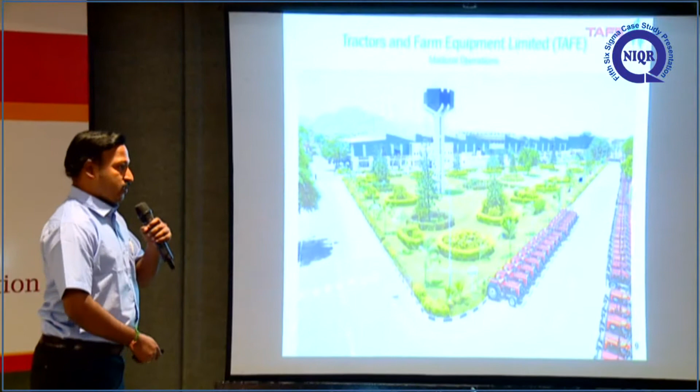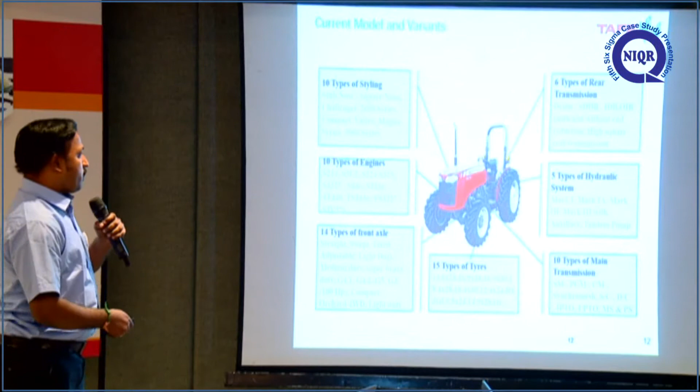These are some of the products we have produced in the range of 25 HP to 100 HP. This is the export model, having various variants supplied all around the world. We are operating cellular manufacturing. These are some best practices followed in our plant. These are some major awards received from external agencies. Now I am going to the case study presentation.

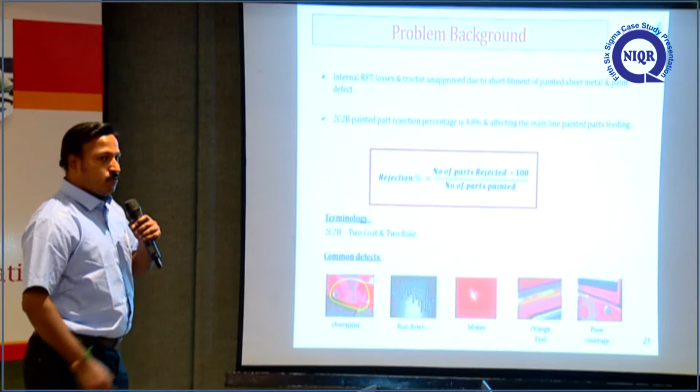Our project is reduction of internal PPM in the 2C2B painting line. This is the overall paint shop: chassis painting, PTCED, 2C2B painting and top coat one. In this area we have selected the project. The problem background is that internal RFT in the overall tractor is getting lost and the tractor goes to unapproved. The approval time is getting delayed. These are the common paint defects.

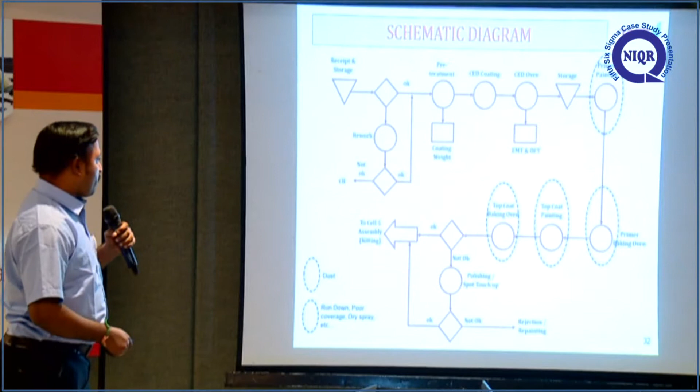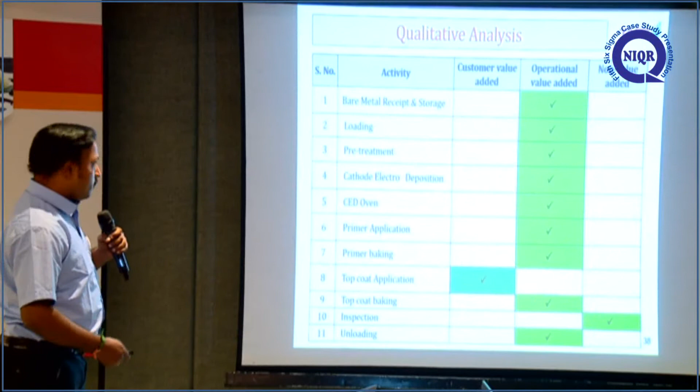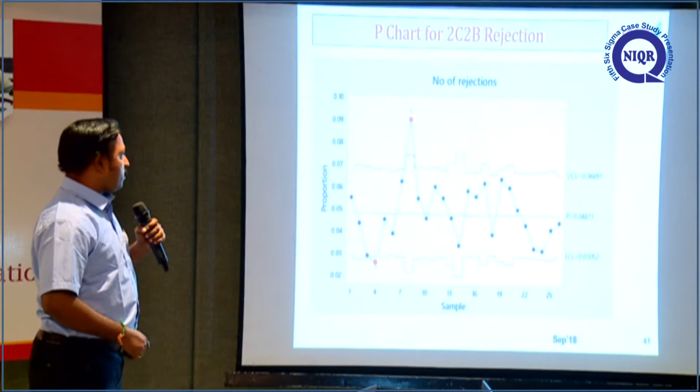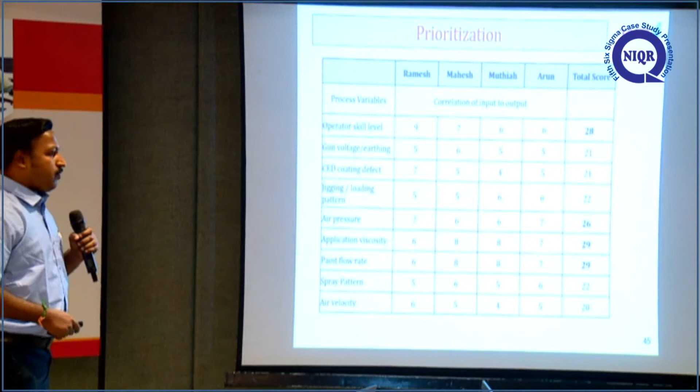These are the measures of the process variables. From that we have prioritized using a ranking method. The team members evaluated all these process variables. Those above 25 ranking marks will be taken for further analysis.

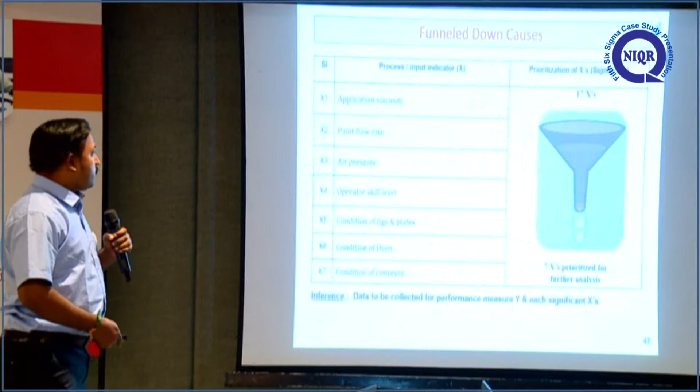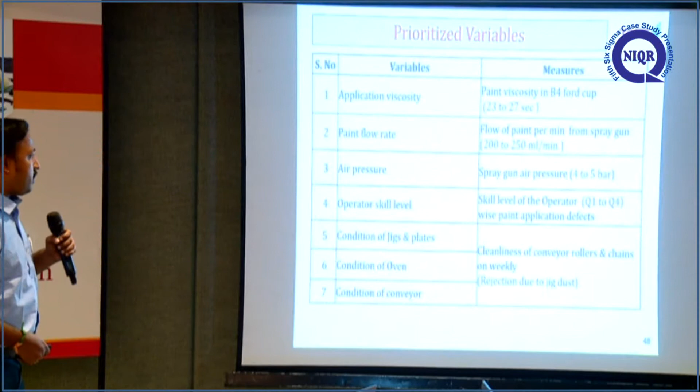Based on the ranking method, we are funneled down to 7 Xs, process variables. All the process variables, these are the measures. Viscosity around 23 to 27 seconds. The paint flow rate should be 200 to 250 ml per minute. The air pressure should be 4 to 5 bar. Operator skill level should be Q4 level.

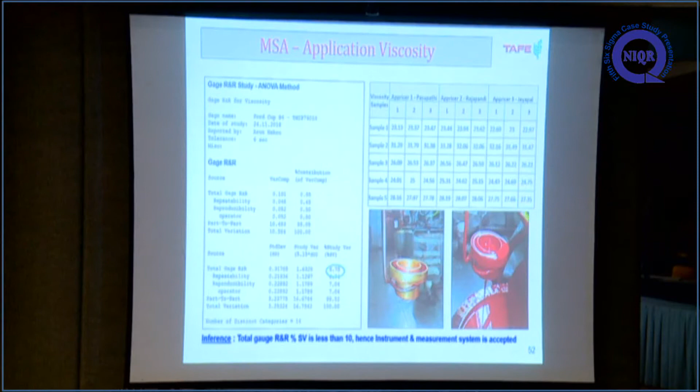Then we are calculating the sigma level based on the process input and number of defect units. Based on that, with the conversion table, the process sigma is 3.1. Analysis phase will be explained by Muthiah.

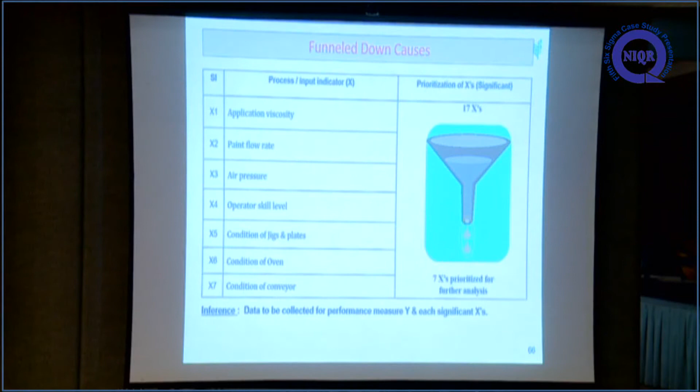Sir, based on the cause and effect diagram, we have funneled down to 7 Xs from 17 Xs. For all 7 Xs, we have analyzed in the analysis phase. First one, for X1 application viscosity, we have done regression analysis of application viscosity with respect to rundown defect. Based on the regression equation, we found the optimum viscosity as 25.7 and the R square value is 62.1%.

The same way, application viscosity with respect to dry spray defect also we have analyzed, and the regression equation shows us 24.9 as optimum value and the R square value is 84.8%. So based on 2 defects, we have taken 25 as a mean, and we have checked our population with a target of 25 using one sample t-test. The p-value is 0, so we have to accept the alternate hypothesis. So there is a significant difference in viscosity between the target and our population value.

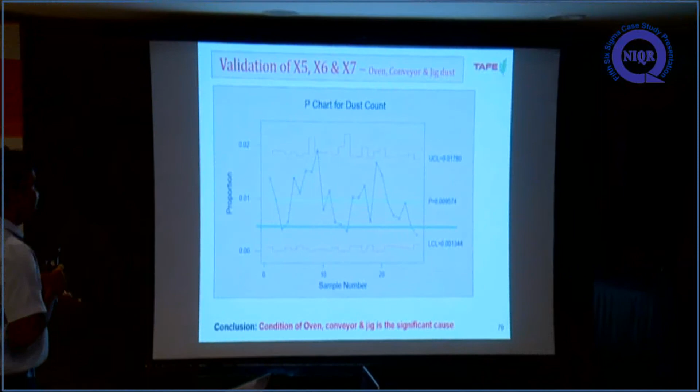For X5, X6, X7, these we have all taken as dust, and dust is a non-parametric value. So we have done a p chart, and the p chart is showing an abnormal condition. So it is also a significant cause. For the oven dust, we have done a quick win improvement. Earlier the oven was cleaned by normal cleaning.

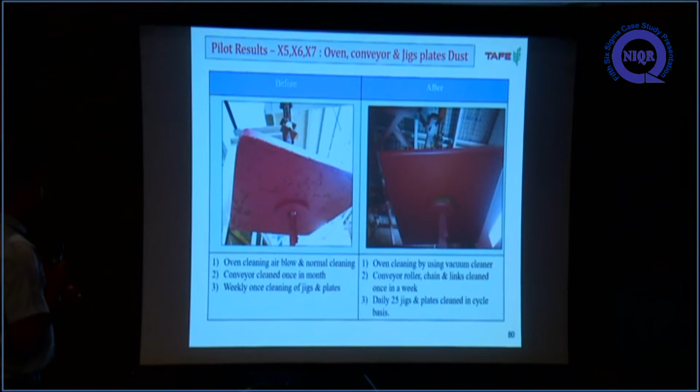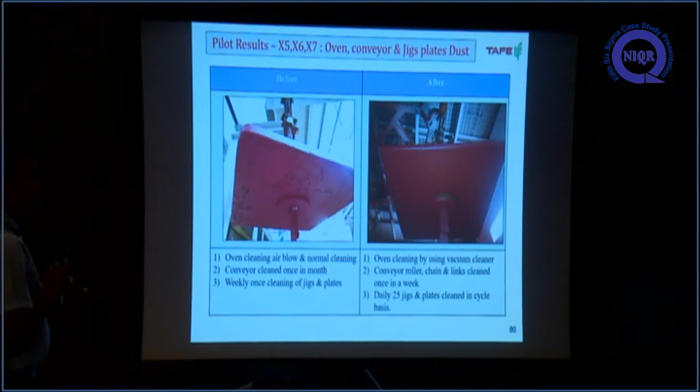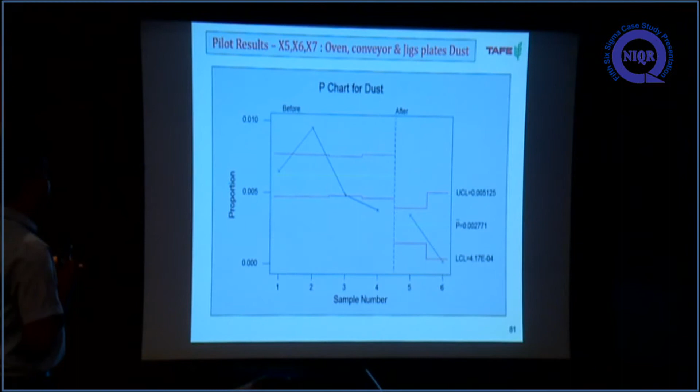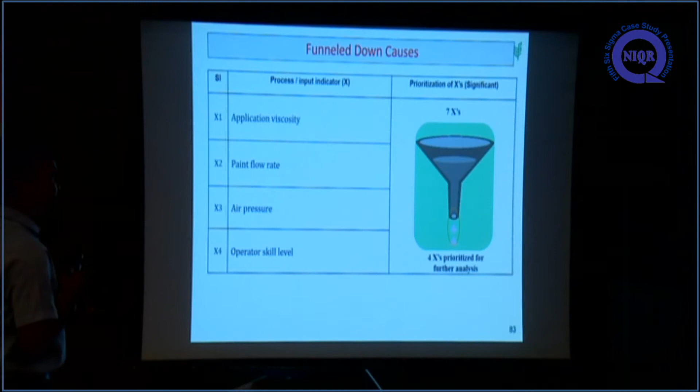So for these 4 causes, the first one is application viscosity. The application viscosity can be controlled using a 2K system, which we have to implement. We have to feed 25 seconds into the system, so that if there is any deviation from 25 seconds, the system will give an alarm so we can change it.

For the paint flow rate and air pressure, operators tend to change the value frequently. Earlier there was no control. We have to provide some control to control paint flow rate and air pressure, and we have to train operator skill.

For the first one, X1, we have introduced a 2K machine. It is an electronically controllable machine. It controls viscosity, air pressure, mixing ratio, and pot life.

If any deviation occurs, it also works as a Poka-yoke. If any deviation occurs, it will give error codes that are shown below.

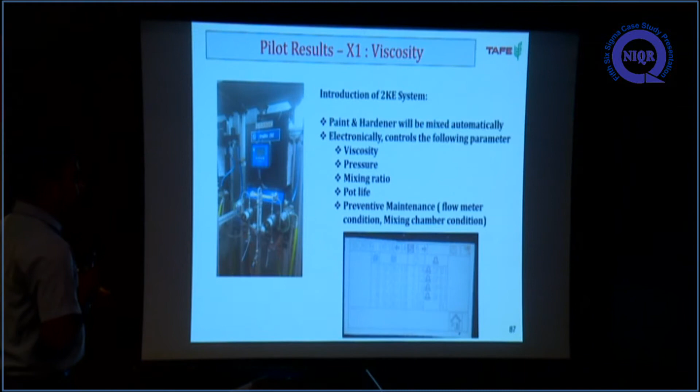After the viscosity improvement, we conducted a 2-sample t-test to check if there is any improvement. The p-value is showing as 0, so we have to accept the alternate hypothesis. So there is a significant difference between before and after, and the mean value of viscosity is reduced from 26 to 25.3.

For the paint flow rate, earlier we used a Binks type regulator where the regulating key cannot be detached. So after setting, the operator could change the flow rate at any point of time. After that, we changed the regulator to Graco. In that Graco, after setting the value, we can detach the key, so the operator cannot change the flow rate.

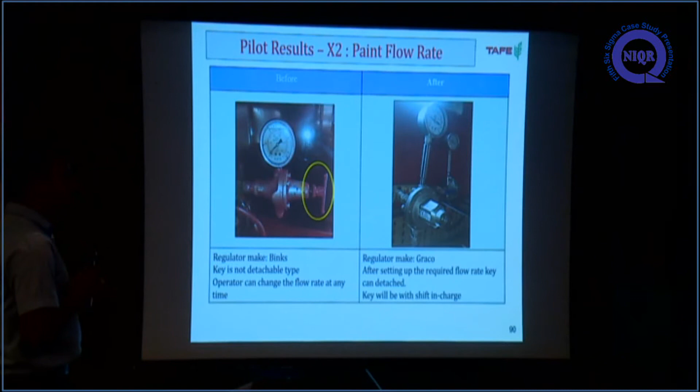These are the improvements. So we checked a 2-sample t-test to see if there is any improvement. The p-value is also 0 for this test, and the mean value is reduced from 236 to 228 ml per minute. As the p-value is 0, we accepted the alternate hypothesis, showing a significant difference in paint flow rate with and without the lock.

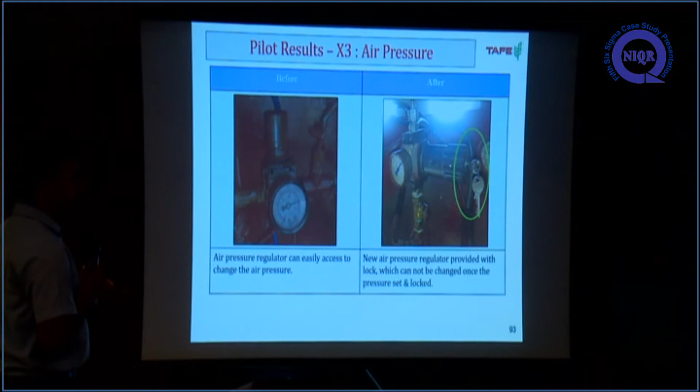For the air pressure, the same type of improvement was made. Earlier there was no key; now we have introduced a key type regulator. We did the same 2-sample t-test, and there is also a significant difference provided.

For X4, to improve the painting skill, we have 2 types of training methods: offline training and online training. For the offline training, we created an SOP in colloquial language for better understanding by painters. During breaks or a non-production day, operators can be taken for online training. We have also done simulation-type training.

This machine is already available, but by doing this project we took the air pressure as 5. We took the sample parameters from the analysis, fed them into the system, and trained our operators using those parameters. This is our 4 months of data in a P-chart for operator skill level improvement.

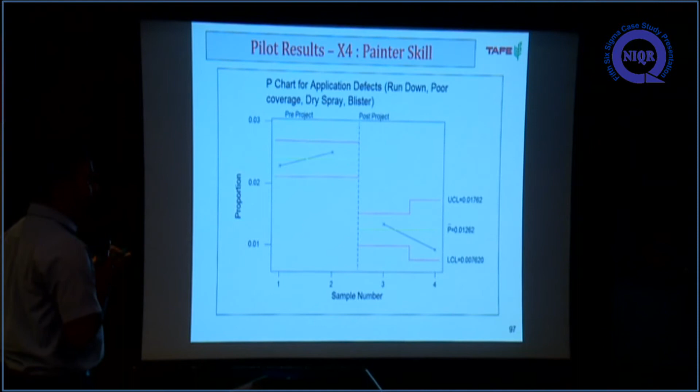We have taken only run application type of defects for the P-chart. The control will be explained by Arun.

All the actions we have improved. After improvement, we standardized by updating the check sheets and other SOPs. This is the check sheet updated for application viscosity, paint flow rate, and air pressure. All the parameters are changed here.

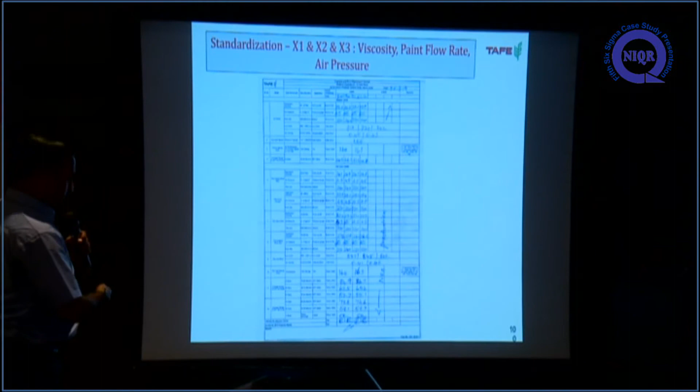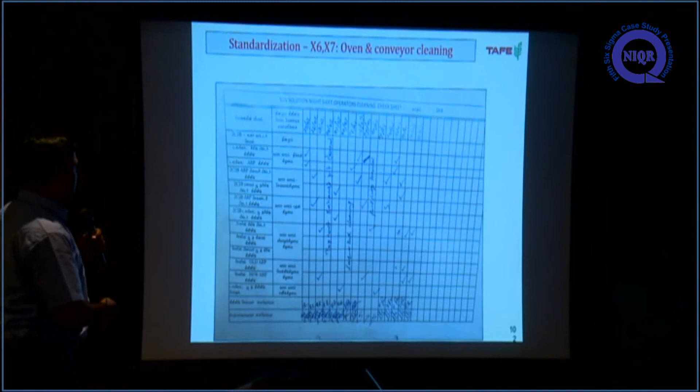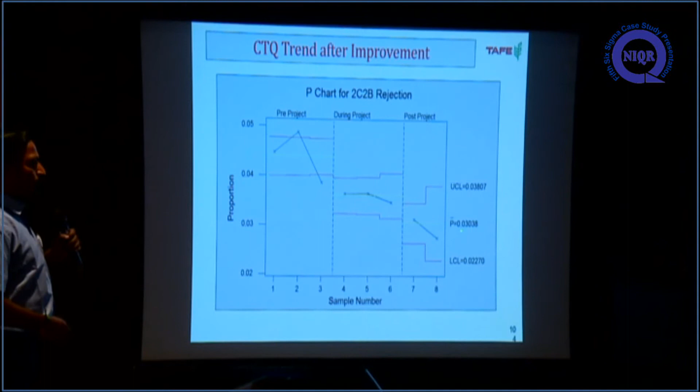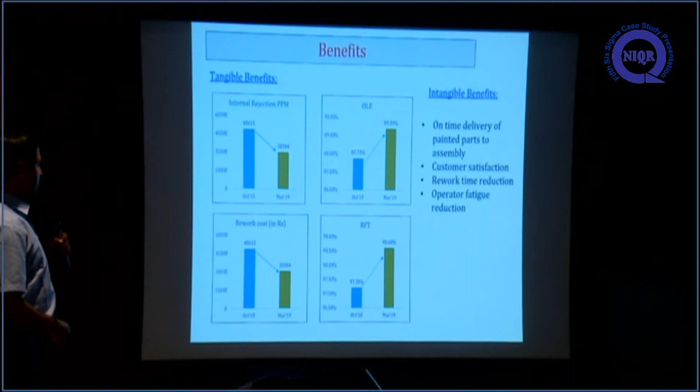These are the tangible benefits. Internal ppm is reduced and OLE improved from 87% to 89%. The rework cost is reduced, and overall RFT is improved from 97% to 98%.

Intangible benefits include on-time delivery, customer satisfaction, reduced rework time, and reduced operator fatigue.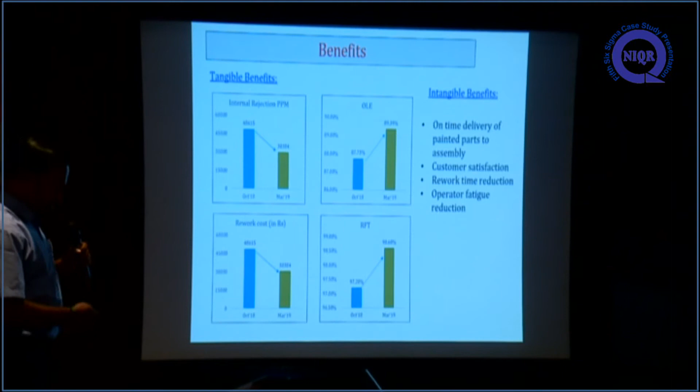Good, very in-depth analysis and a lot of tools he has used. Congratulations for that.

You were mentioning that originally it was 48,615 ppm and you wanted to target 30,000, but then subsequent figures are 28,000 and all that. Where is the difference actually? Sir, the project is completed here itself, in March itself. That is the average of February and March. They are taking February and two months data, after we sustained at this level.

But this also you need to analyze, say August - okay, so how about September, October? Because there is some increasing trend, so that sometimes gives a doubt about your standardization, how good it is. The project standardization was in December and January.

But these trends, you need to look at it again through daily management, because we don't know how September and October are. Suppose that is early gone, we don't know. Then again we need to think about the solutions and standardization - how good it is and how people are following it. That skill improvement also, we need to look at it.

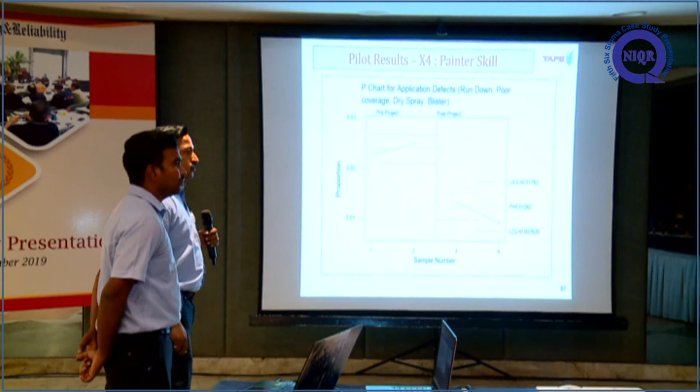You are trying to show the proportion of the defect has come down, but how many samples could you have taken? Sir, this is 100% sample. This is one month - there is no average of one month. But if you can put all the points, that will be good. It looks as if we have taken only 2 samples. Otherwise, it's good, very good.